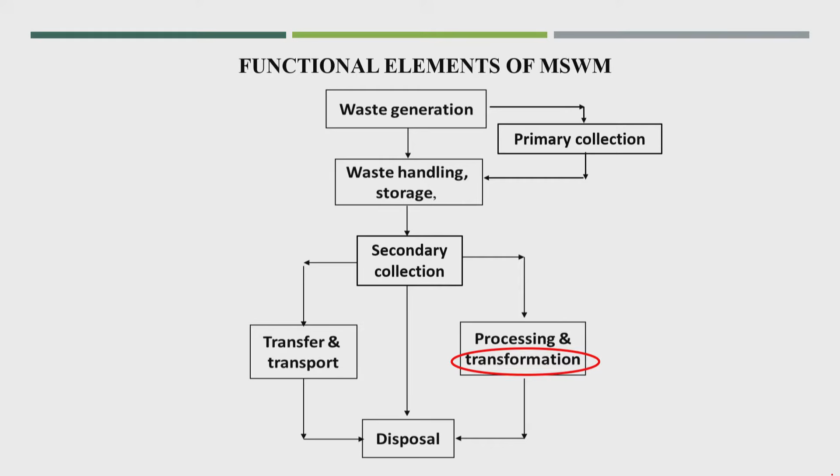So we are at module 8, chemical transformation, in the fifth functional element, transformation. In the previous class I talked about whether waste could be useful as a fuel. So you got the idea about whether the waste could be used as fuel, again depending upon different parameters and especially on calorific value. So today we will talk about incineration, a proper combustion process.

So what is the meaning of incineration? Incineration is a waste treatment process that involves combustion of the waste at very high temperature in the presence of oxygen. We can call it combustion also, and it results in the production of ash, the solid residue produced after the combustion or incineration process. Flue gases are produced, very polluted gas, and along with that, because it is a combustion process, heat also gets produced.

So incineration is a feasible technology for combustion of segregated waste, as I already told in the previous class. If you have segregated waste, especially at the source, the dry waste is very good for the incineration process, especially paper and plastic, which are highly combustible matter with very high calorific value.

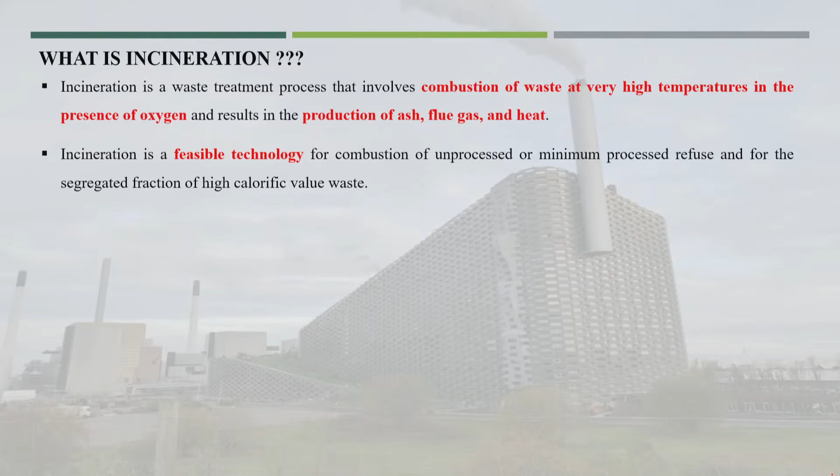And this is one of the very best technologies to reduce the volume, because the ash percentage is very low, 5%, maximum 10%, not more than that will be produced. So volume reduction of 90 to 95% is possible from this technology.

The potential for energy generation, because that heat we can convert into power or energy, depends upon the composition, density, moisture content, and different parameters, especially the volatile solids. If organic content or volatile solids are more, then the energy production will be very high.

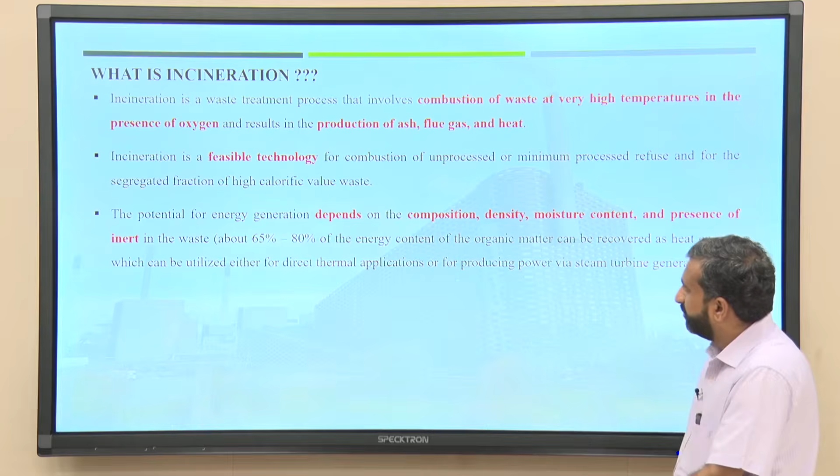About 65 to 80% of the energy content of organic matter can be recovered as heat energy from the incineration process, which can be directly used in thermal applications for producing power or steam turbine generation. We will get three different products: heat will be the first product, from that steam we can produce, and from that power we can produce.

As I was talking about, incineration helps to reduce the landfill volume. Obviously, the volume reduction is more in this case. So whatever waste is reaching the disposal site or landfill site, at least that landfill site can work for more time.

Incineration is feasible when there are no better options for processing of waste, or a shortage of land for landfilling. So this is a very important point, if no better option is available. So what could be the better option for this dry waste, which is also combustible waste? The better option is recycling, which we talked about in the last few modules.

Recycling is the better process, because there is no need to worry about the flue gas or whatever ash is produced, and we do not need much energy. There is no need for this very high temperature combustion process in recycling, so that is the better process. Or not recycling, but reuse of those materials could also be possible; that is also a better option. If those kinds of options are not available, then incineration is one of the very important technologies or better options.

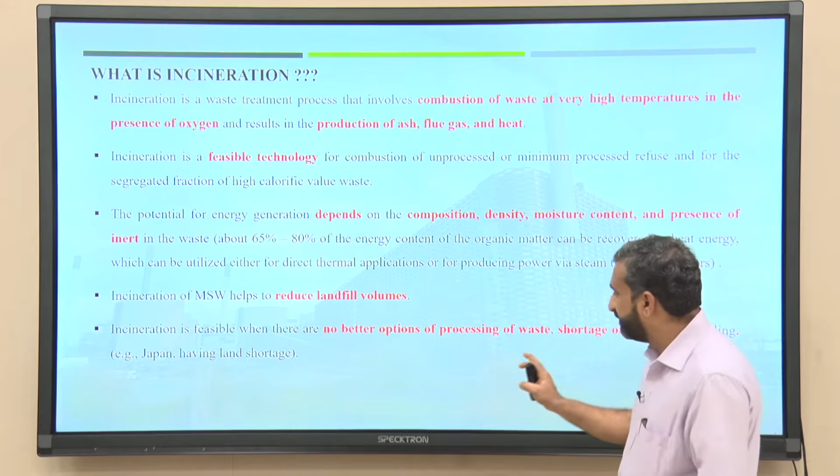And also where there is a shortage of land, like one example given, Japan is a very small country, the land availability is very low. So such countries cannot depend upon finding land for landfilling of such waste. So this technology is a better option for such countries.

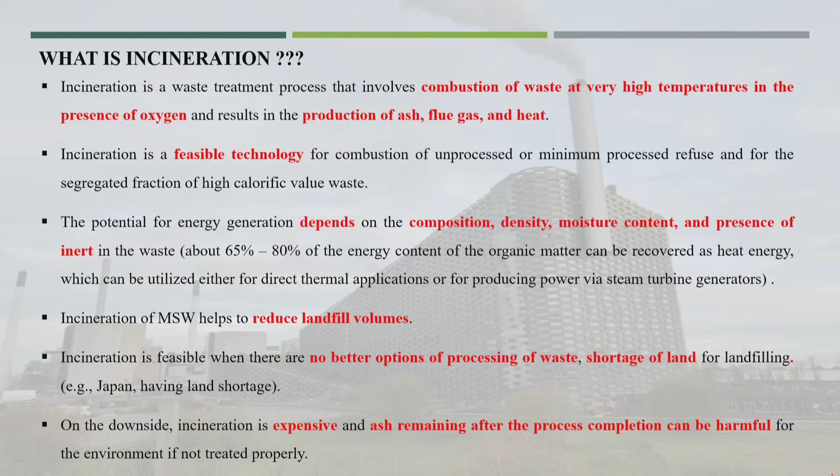On the downside, incineration is an expensive process, and the ash remaining after the process completion can be harmful. Not only the ash, but also the flue gas produced. We need a lot of treatment processes to treat the ash and the flue gas produced during the incineration process.

Now, the incineration process, what exactly is the incineration process? In brief, in the furnace the combustible components react with oxygen in the combustion air and release a significant amount of hot combustion gas. That combustion gas we normally call flue gas. The moisture content of the waste is evaporated in the initial stage of the incineration process, and then the combustible

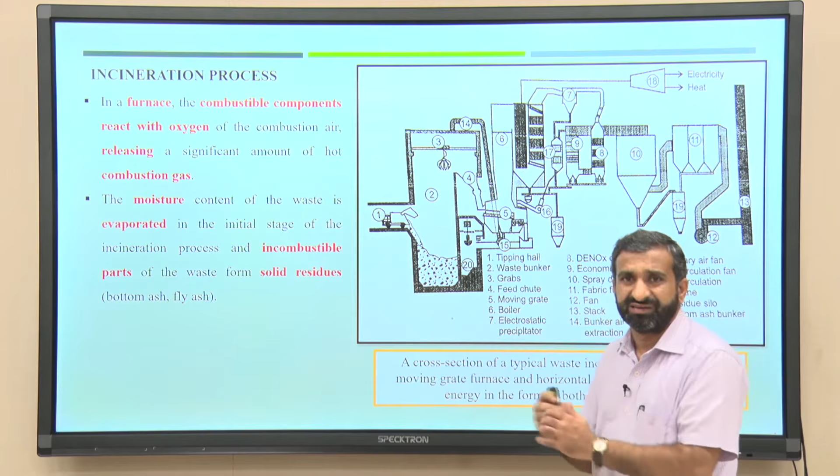matter will get combusted. So, the furnace is designed in such a way that initially when the waste is received in the incineration process, first moisture will get removed and finally the combustion process will start, and because of that ash will get produced, and possibly uncombustible matter will also come out into the solid residue.

Through incineration, the solid constituents of the waste undergo a range of processes as a result of exposure to heat and contact with the combustion air. So, whatever dry matter is put into the incineration process or the furnace will go through a range of processes, the combustion processes.

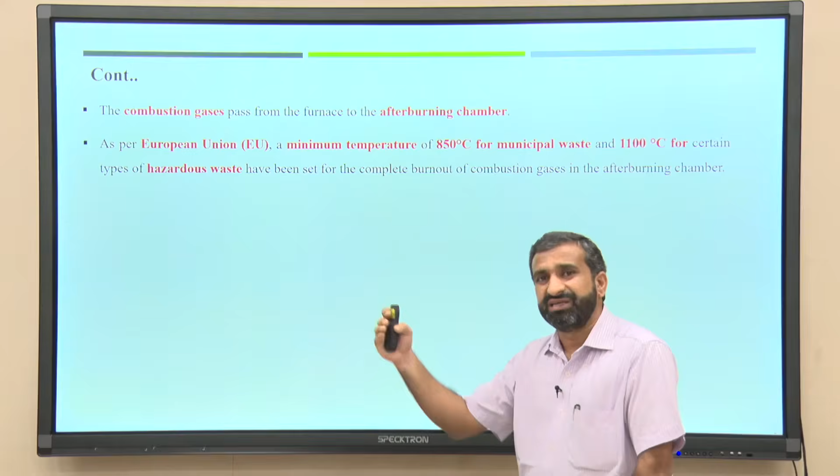Then the combustion gas passes from the furnace to the after burning chamber. There it undergoes the after burning process, and from that we can produce heat, and that heat we can convert into steam, and from that steam we can produce power from that particular combustion gas.

In the European Union, the minimum temperature is 850 degree centigrade for municipal waste and 1100 degree centigrade for certain types of hazardous waste. That is for the complete burnout of the combustion gases in the after burning chamber. So, you see that the European Union was the first, I can say, the countries

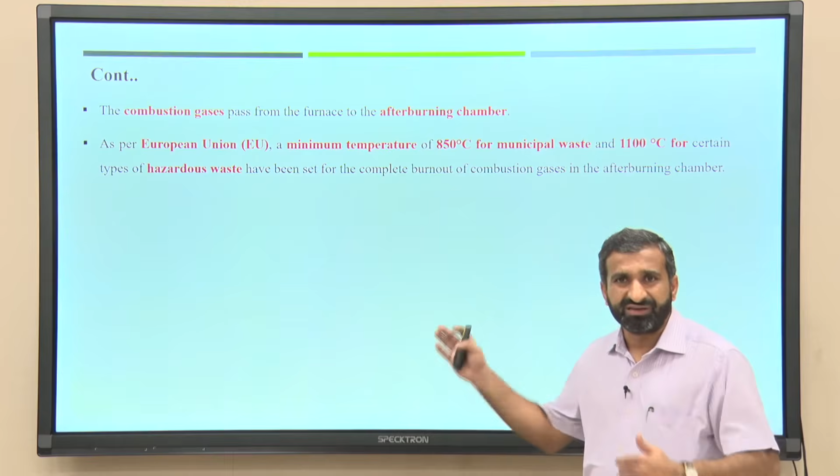under the European Union finalized the temperature of 850 degree centigrade in the first furnace chamber, and for the after burning process of the combustion gas the temperature was finalized at 1100 degree centigrade, and this temperature should be maintained for a minimum time of 2 seconds as measured from the last injection of combustion air. So, that is the first time the European Union came up with such standardization of the furnace temperature.

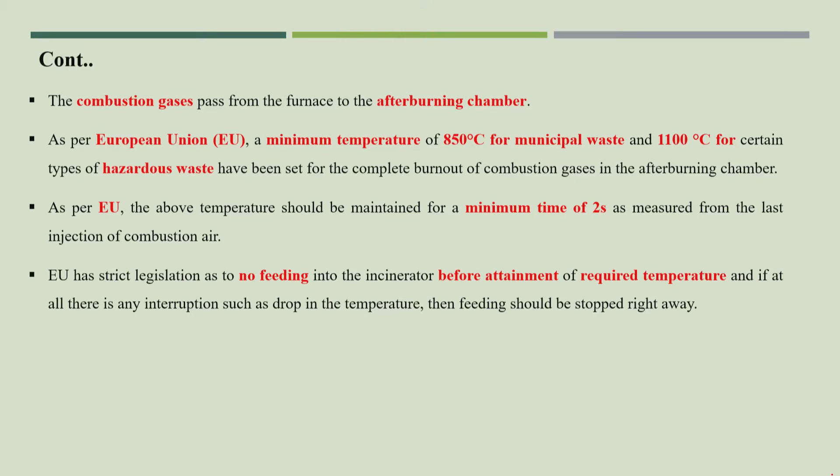A lot of countries like India also came up with some kind of legislation, which I am going to show here. The EU has strict legislation as to no feeding into the incineration before attainment of the required temperature. See here, they made it very strict legislation: no feeding if we are not attaining the required temperature. That is the important one. If we are not getting a temperature of 850 degree centigrade, we can't feed that kind of waste into the furnace process.

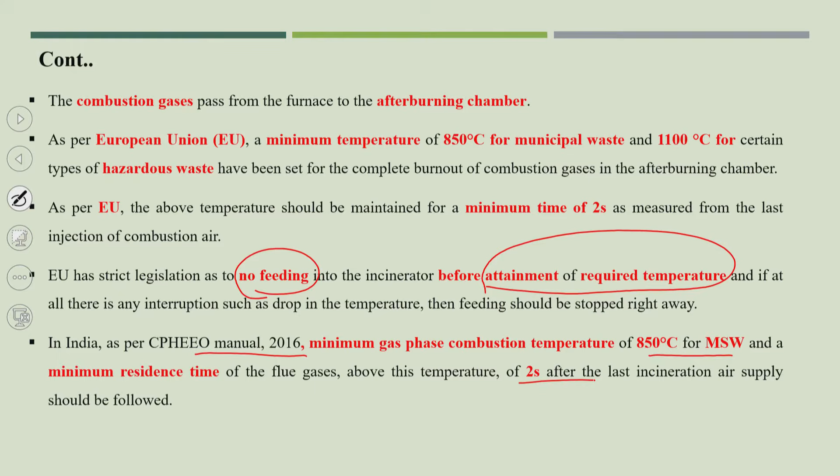And now, because we also have the Solid Waste Manual 2016, India also came up with this kind of standardization. The minimum gas phase combustion temperature is the same, 850 degree centigrade for MSW, and the minimum residence time of the flue gas above that temperature is 2 seconds after the last incineration air supply. So, this standardization also came up.

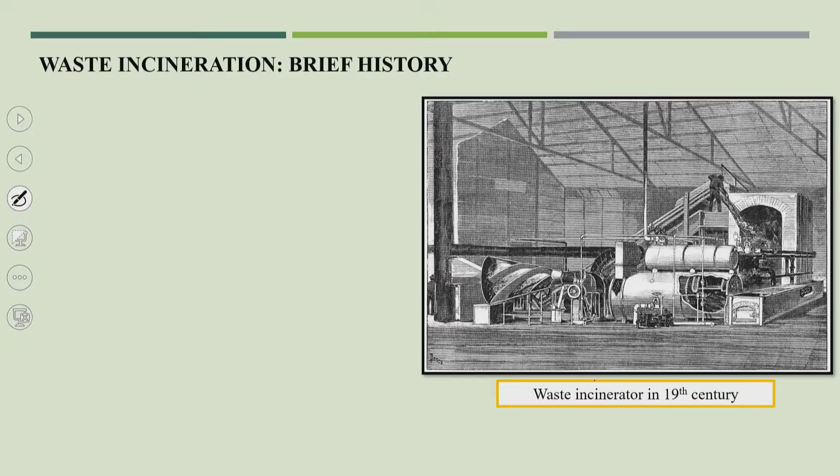I will give a few more standardizations or suggestions from the Solid Waste Manual of 2016 if you try to install incineration plants in India, especially for MSW. Now, before going into the incineration process, I thought of showing you some brief history of the incineration process.

So, the first incinerator was developed in the UK in the 19th century; it is a very old method, because the problem was that in all European countries and especially the UK, land availability was very low, and they started industrialization 100 years before. And these industries did not have proper treatment processes for their solid residues, not for polluted water, wastewater, and not for the solids either.

And most of the waste they were able to combust. So, that was the idea behind starting incineration in the 19th century in the European countries. And waste incineration plants treat waste of great variation in composition. Obviously, in those days, 100 years or 50 years before, in the European countries the composition also used to have very large variation.

And this is one of the technologies of the incineration process. We are also going to talk about moving grate technology, which was developed in the 1920s and 30s, and developed as a combination of grate with rotary kiln. This is another technology. Normally, we can find the rotary kiln after the moving grate technology. So, both technologies together, which I am also going to talk about in the next lecture.

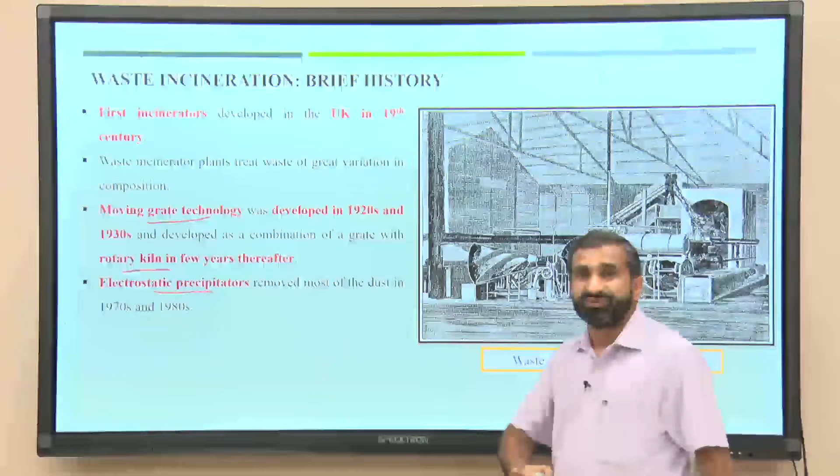This is one of the very important technologies to treat the solid concentration in the flue gas, especially dust. Very small particles of dust can also be removed from the flue gas, and the flue gas is a very high temperature gas. Temperature goes up to 600, 800 degrees, and from that the dust is removed by this kind of technology.

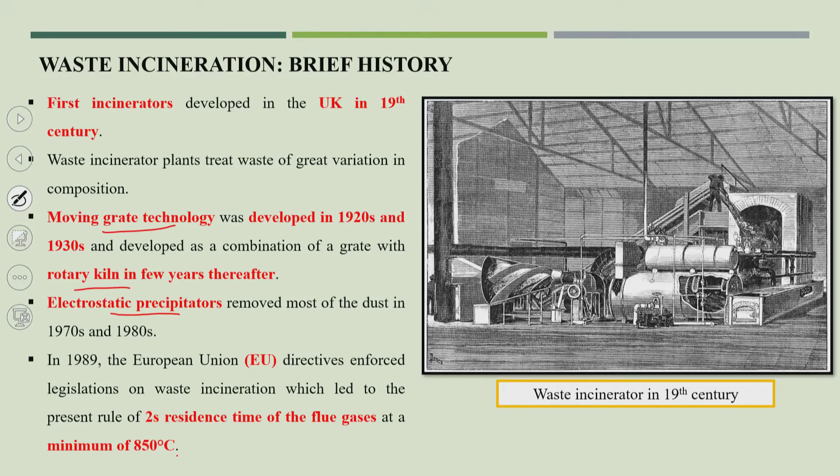In 1989, the European Union came up with this directive, which I showed in the last slide: 850 degrees centigrade with 2-second residence time. Okay. In 1989. Now, we will talk about the combustion technology.

The combustion system is commonly referred to as the heart of an incineration plant. The combustion system can be classified into two different types. First is the mass burning of non-homogeneous waste. So, it is simple combustion, mass burning, complete burning, especially for non-homogeneous waste.

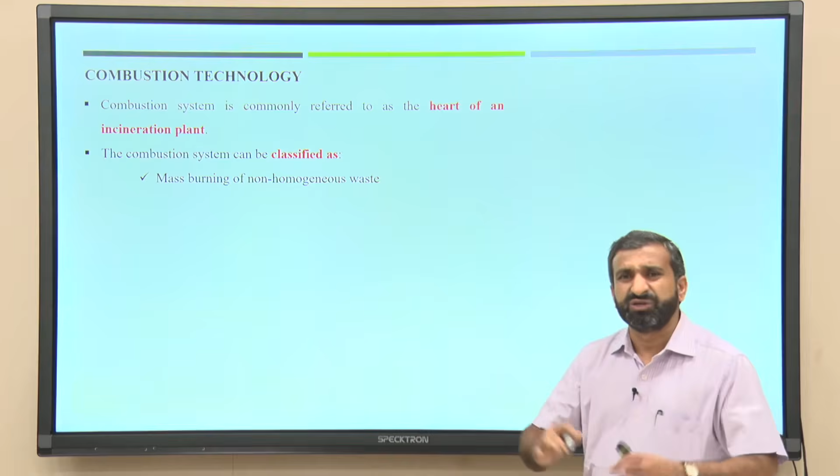Especially in a developing country like India, we are getting a lot of non-homogeneous waste, meaning a lot of heterogeneity in the waste. So such a combustion system could be used by our country also. This is moving grate technology, and the other is burning of homogeneous waste of limited particle size.

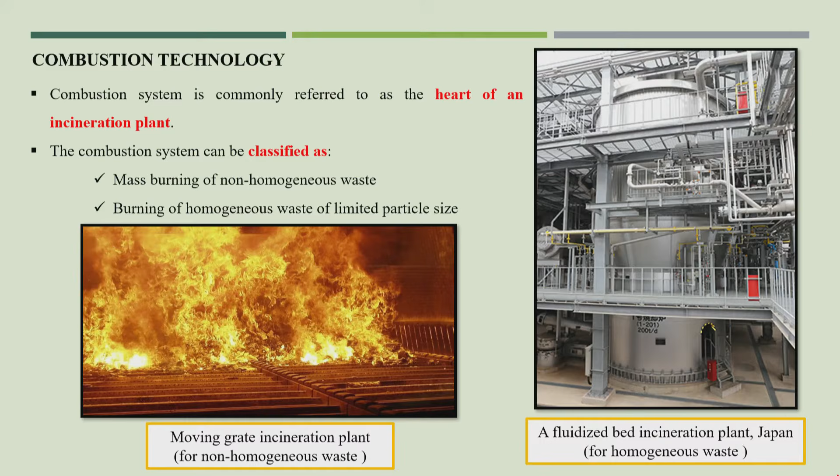This is another technology we are going to talk about, the fluidized bed incineration plant. This is specially for homogeneous waste, and a limited particle size is required. Normally, such technology is not that beneficial for MSW, but we need to know that if we are planning for a very special kind of waste like sewage sludge, or even plastic alone, such technology could be used.

Now, before incineration, especially in India, we require pre-treatment of waste or pre-treatment of the dry components of the waste. So, depending on the quality of waste and the incineration system, some pre-treatment technology may be necessary, which involves sorting and homogenization of the waste before incineration.

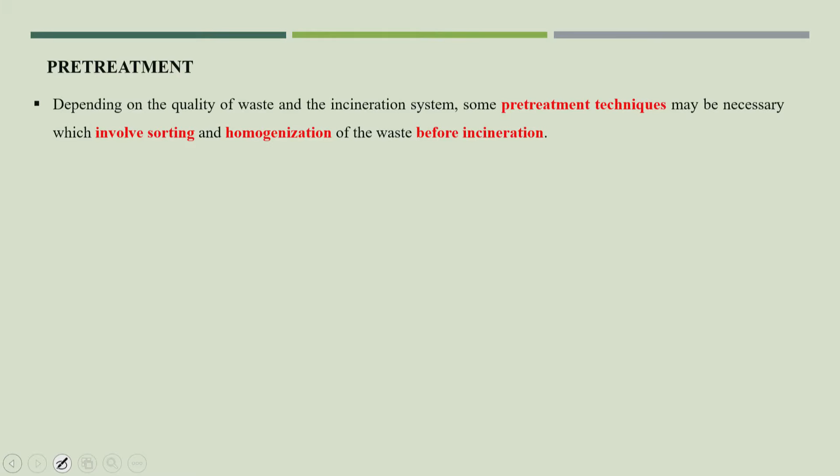That was the idea behind pre-treatment: sorting means contaminants or non-combustible matter will be removed from that material, and we try to homogenize the material, if not in the type or composition of waste, at least so the size is the same. So that combustion will be more beneficial.

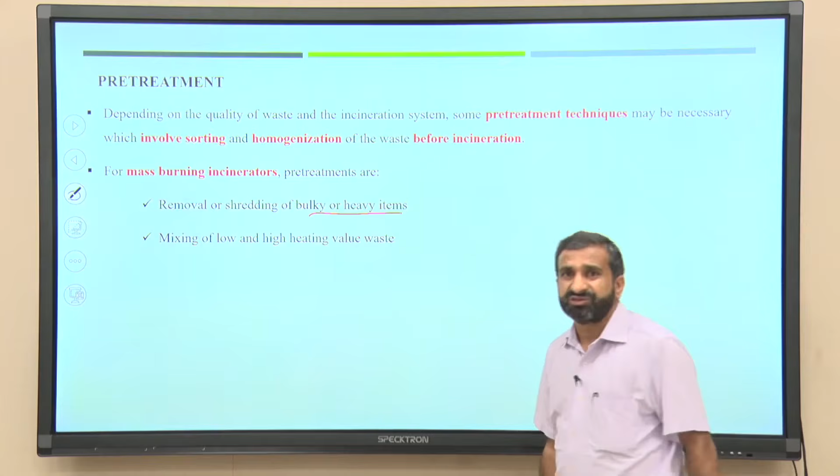So, for mass burning incineration technology, the pre-treatments are removal or shredding of bulky or heavy items. Large items are difficult to burn out completely in the furnace. So these bulky or heavy items are removed, and there is mixing of low and high heating value waste. This is also a very important

idea of pre-treatment, because the waste is collected from different locations in the city and different vehicles are coming to the incineration facility. So, it is possible that sometimes a vehicle comes with low calorific value waste and sometimes very high calorific value waste comes to the incineration facility.

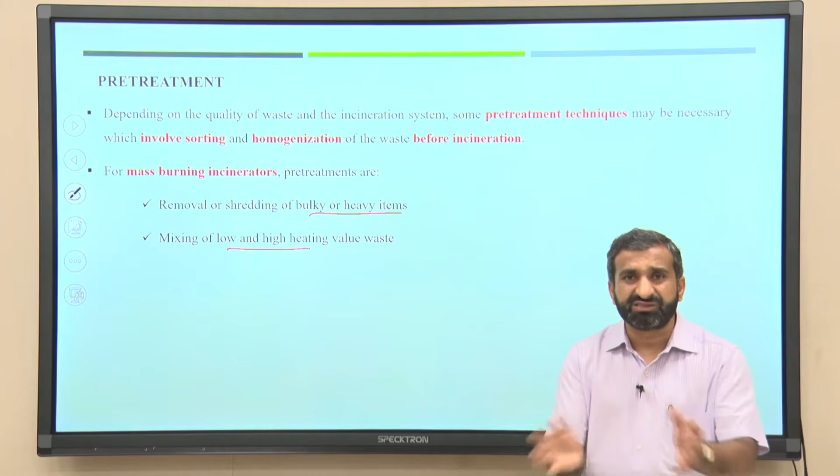So, this is a very good idea, if you can mix both kinds of waste. Then we will get the proper temperature in the furnace, which is what our standards require: maintaining a temperature of 850 degrees centigrade.

For homogeneous waste, pre-treatments are required; this is for the second combustion system facility. The pre-treatments required are shredding for homogeneity of waste, screening for narrowing of the particle range for the fluidized bed. Narrowing means making the size small for the fluidized bed technology, and removal of metallic iron with a magnet. Because not only metal, but glass also has to be removed for this technology.

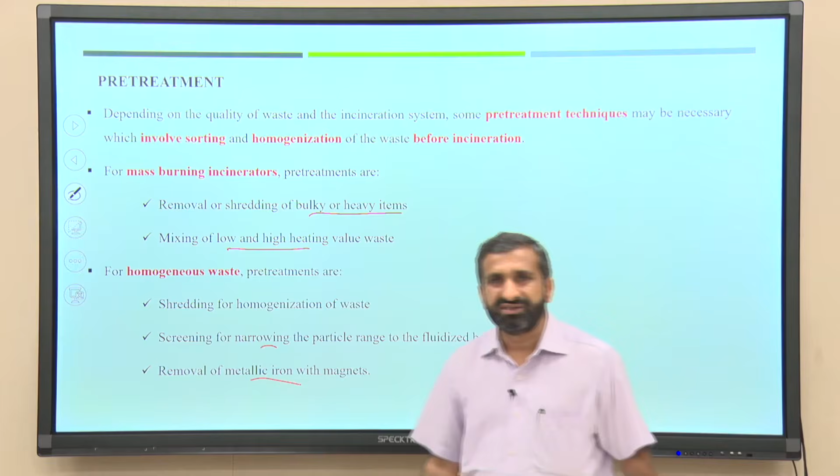Suppose in mass burning incineration the metal items or glass items are not sorted out. Those are not combustible items; they will come out into the solid residue, but that will not create any problem in the furnace.

So, now we will go for types of incineration. There are three different types of incineration. First is the moving grate incinerator. This is a very simple incineration facility, a very well known technology. Similar kind of technology we can find in coal power plants also. Inside the furnace you will find the grate. I will show you some photographs and pictures of the grate so you can understand.

The conventional mass burn incineration based on moving grates consists of a layered burning of the waste on the grate that transports the waste through a furnace. So, you see, it is a layered burning of the waste on the grate. The combustion will be on the grate, and then this grate will transport the waste through the entire furnace.

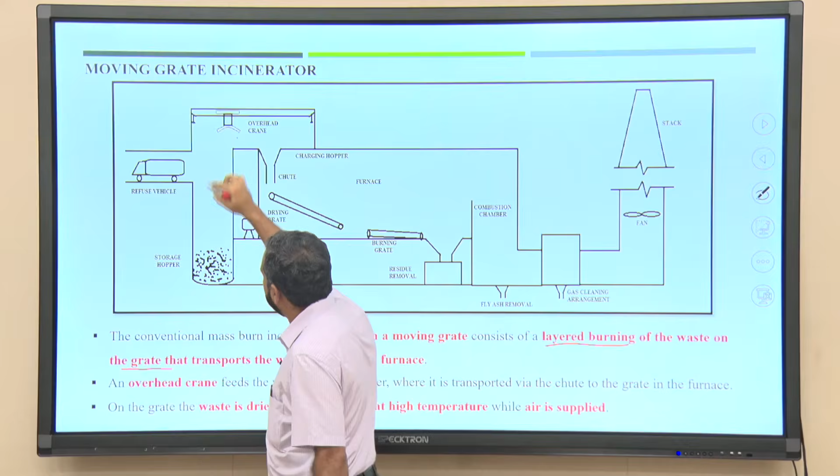Now, this is the line diagram. You can see here solid refuse is coming to the storage hopper, and this is the overhead crane. Through this crane the waste is fed into the incineration furnace facility. This is the furnace and these are the grates, this is one grate, this is the other grate. This is for drying, and a fan is provided at the bottom of the grate so that air can be supplied into the furnace.

Here waste is getting combusted and finally the solid residue will come out. This is the second combustion chamber; whatever combustion gases are produced get combusted in the combustion chamber, and after the second combustion chamber the gas will go through the gas cleaning arrangement. So, here is the flue gas treatment facility, and finally it goes to the atmosphere through the stack.

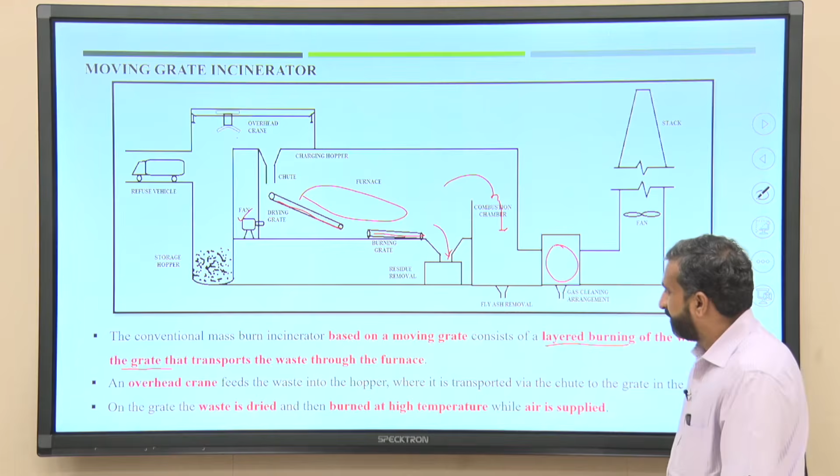Here it is written: the overhead crane feeds the waste into the hopper, where it is transported via the chute to the grate in the furnace. On the grate the waste is dried and then burned at high temperature while air is supplied. Now, the ash including the non-combustible waste fraction leaves the grate via the ash chute as slag or bottom ash.

So, this is the bottom ash; another ash of very small particle size will also be produced through the grate. When we talk about the solid residue, I will explain properly. And even in the flue gas cleaning treatment facility, a lot of fly ash will get produced.

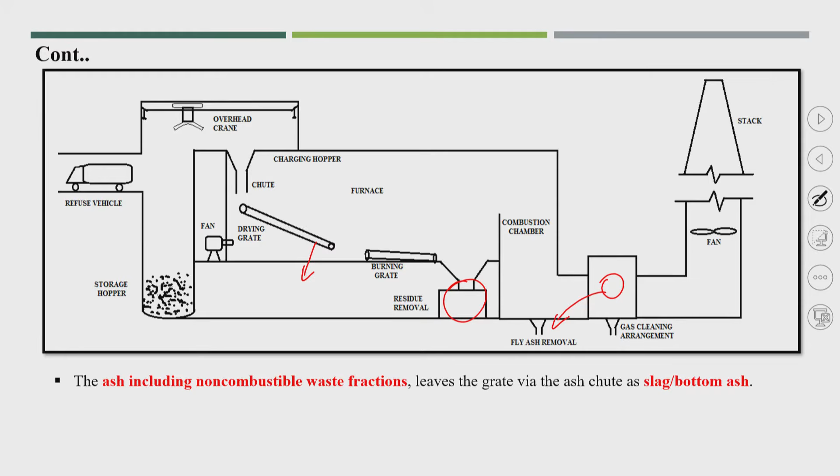The bottom ash or slag drops from the end of the grate into the water trap of the slag pusher. This is a slag pusher, here this is a simple water tank. Whatever bottom ash is produced goes into the water, because it is a very fine particle, for storage. There will be a slag pusher; this tank will get removed once it is completely filled up. Then another tank is provided in the same area.

The slag is cooled by contact with water, and a large piston pushes the slag to the conveying system. The amount of slag, the bottom ash, is usually 10 to 25% by weight of the waste feed, depending on the waste composition. So, you see here 10 to 25% slag will get produced by weight.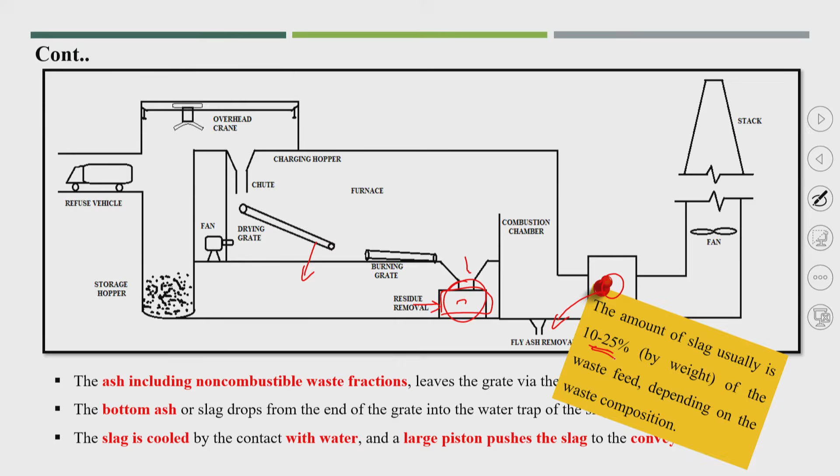Then fine particles and materials with low melting point may drop through the narrow gaps between the elements of the grate. As I was saying, from these the very fine particles or fine ash are produced, which is 1 to 5% of the total amount of ash production. The flue gas from the furnace contains a minor part of the ash. From this flue gas the fly ash will get generated. The flue gas constitutes about 5 to 10% of the total ash content.

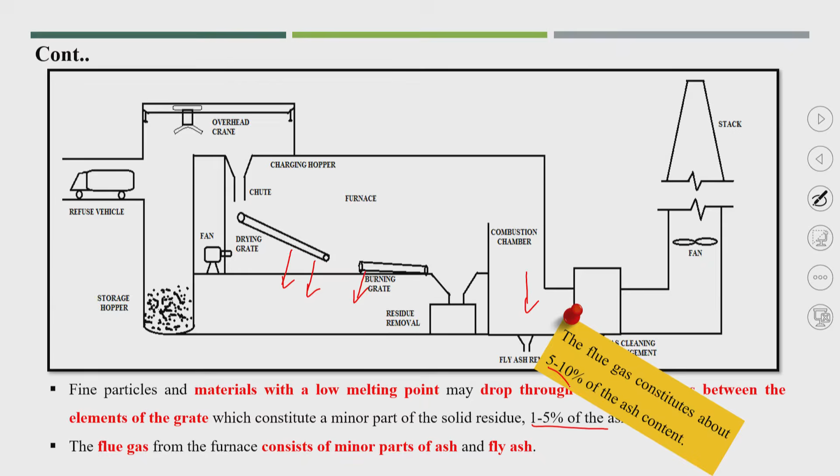Now, what are the advantages and disadvantages of the moving grate system? The advantage is it can accommodate large variation in the waste composition and in heating value.

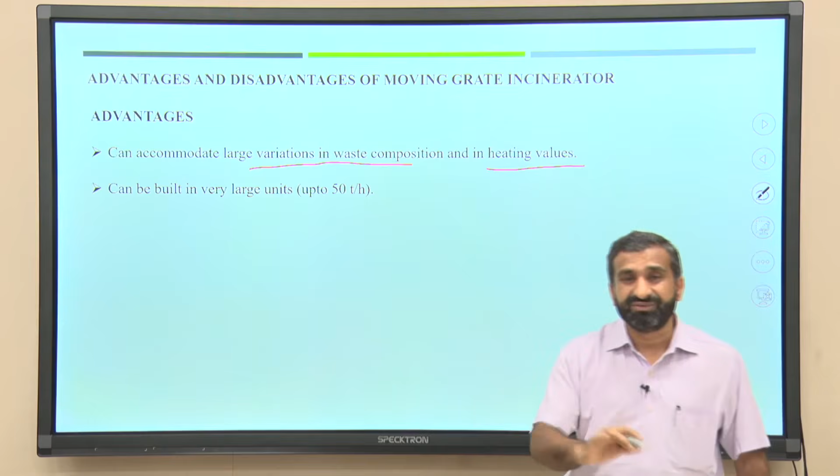So, what I was sharing about this technology is that it is highly beneficial for large variation in the waste composition, also variation in the heating value, and different calorific value mixes can be combusted in this technology, and it can be built as a large unit, up to 50 tons per hour capacity. This technology is very well known in coal power plants.

Another advantage here is that a lot of literature is available, and a number of countries have installed this kind of technology. So, when any new country like India is trying to have such an incineration facility, we can get a lot of literature, especially we can look at the failures of such incineration facilities.

And the disadvantage is that plant installation cost is very high and maintenance cost is also relatively high. That is the major problem of these technologies. All incineration and combustion facilities require a lot of money, not only for the capital cost, but the maintenance cost is also very high. So, if you are planning an incineration facility and not planning to get power production or any kind of product from it, it will be a very costly process.

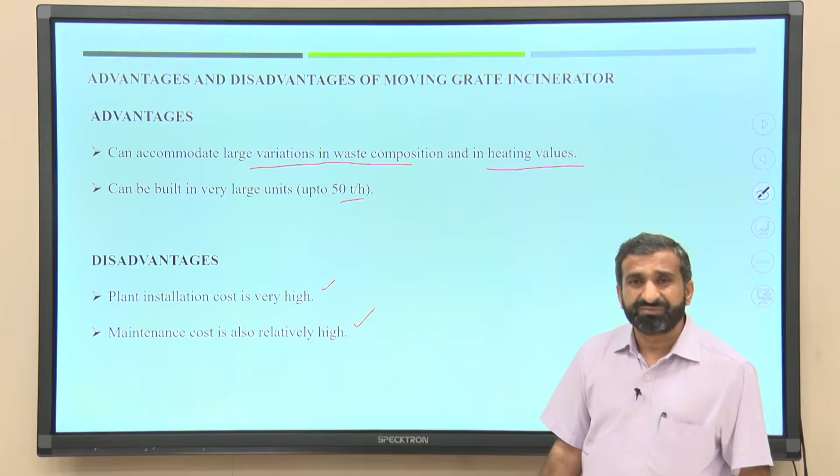So, in most cases, when countries tried incineration facilities, it was not only for volume reduction, but also to get some kind of product out of it. This product could be heat, steam, or power. By selling such products, we can at least recover some of the maintenance cost.

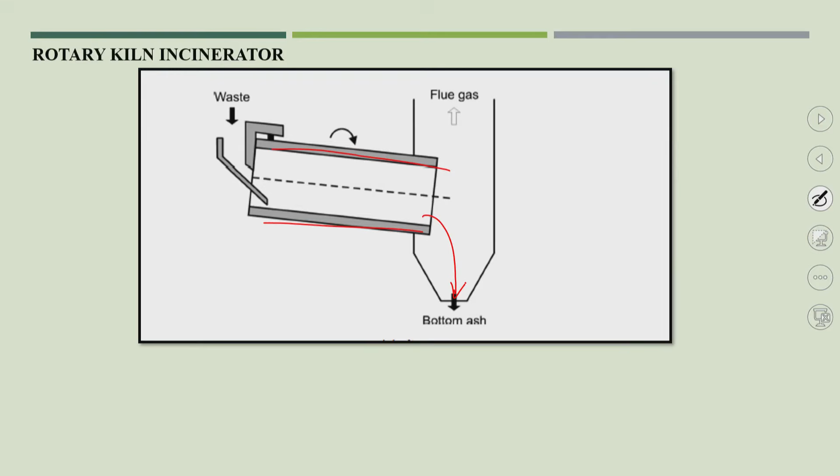Now, the next technology is rotary kiln incineration. You see here this is the rotary kiln, and finally, after incineration, bottom ash is produced and the flue gas comes out. Mass burning incineration based on the rotary kiln consists of layered burning of waste in a rotating cylinder. The material is transported through the furnace by the rotation of the inclined cylinder.

So, this is the cylinder that is rotated. The rotary kiln is usually refractory lined, but can also be equipped with water walls. So, these are the refractories or water walls. The diameter of the cylinder may be 1 to 5 meters and the length could be 8 to 20 meters. You can see here, this is the rotary kiln.

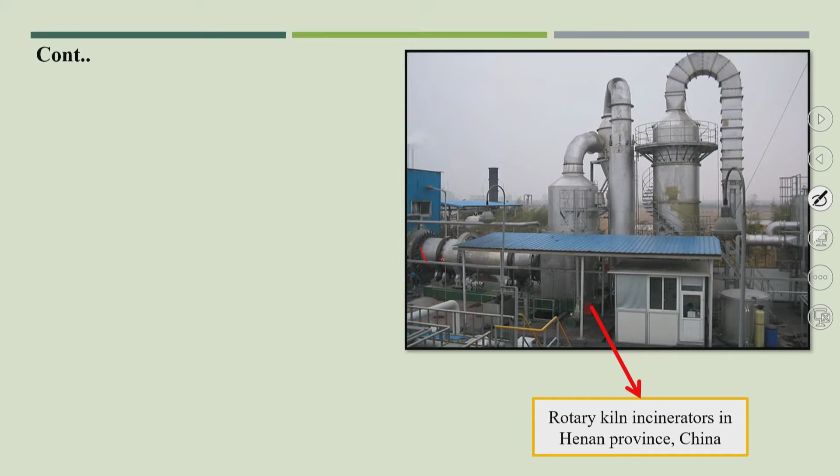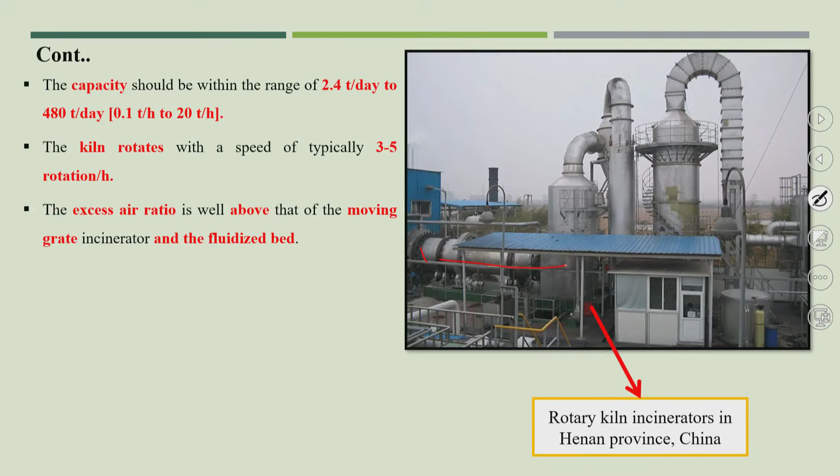The capacity is within the range of 2.4 tons per day to 480 tons per day, or 0.1 tons per hour to 20 tons per hour. The kiln rotates with a speed of typically 3 to 5 rotations per hour. The rotation is not that fast. The excess air ratio is well above that of moving grate incineration and fluidized bed incineration, which is a third type of incineration. So, more air will be supplied for the combustion process.

So, this is another incineration facility, a rotary kiln combustion facility from China. The energy efficiency does not exceed 80%, which I think is still acceptable.

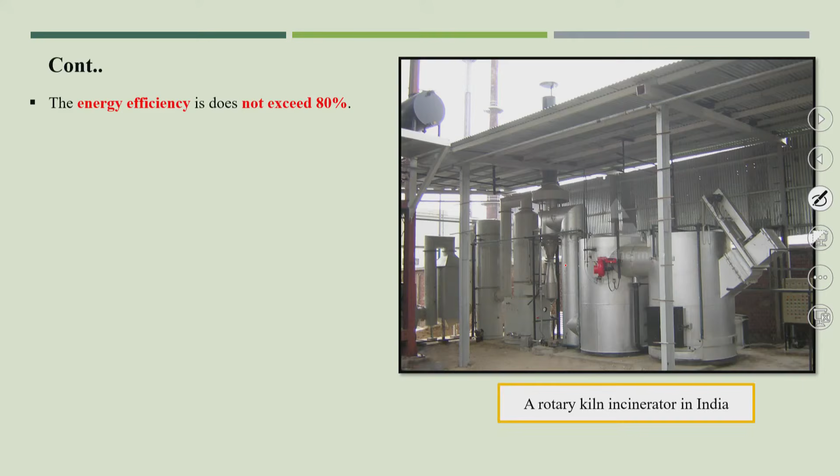The retention time of the flue gas is usually too short for complete reaction to take place in the rotary kiln itself, so the cylinder is followed by an afterburning chamber, which may be incorporated in the first part of the boiler. That is a very important point for the rotary kiln, because the retention time of the waste in the rotary cylinder is too short for complete combustion. So, providing an afterburning chamber is more beneficial.

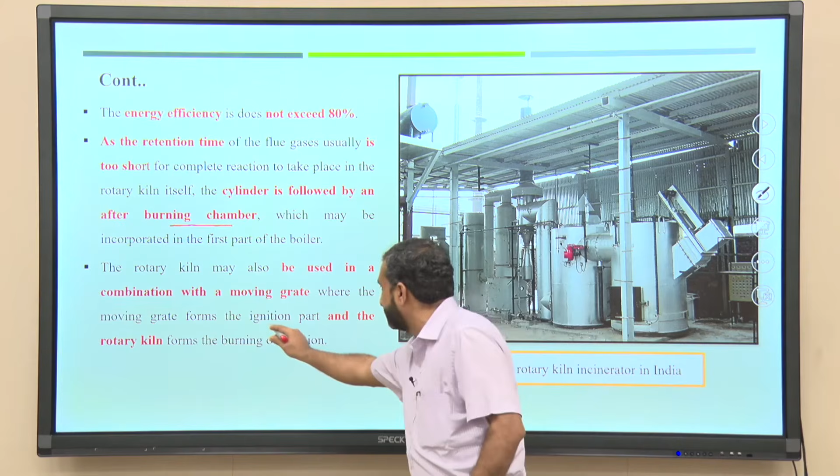Because of that, the rotary kiln may be used in combination with the moving grate, where the moving grate forms the ignition part and the rotary kiln forms the burning out section. I think this is a very good idea, combining the two technologies. The first combustion of the solid material will be inside the moving grate furnace, and whatever combustible gas comes out is combusted in the rotary kiln. Because in the moving grate a second combustion chamber is also required, this combustion chamber could be a rotary kiln system.

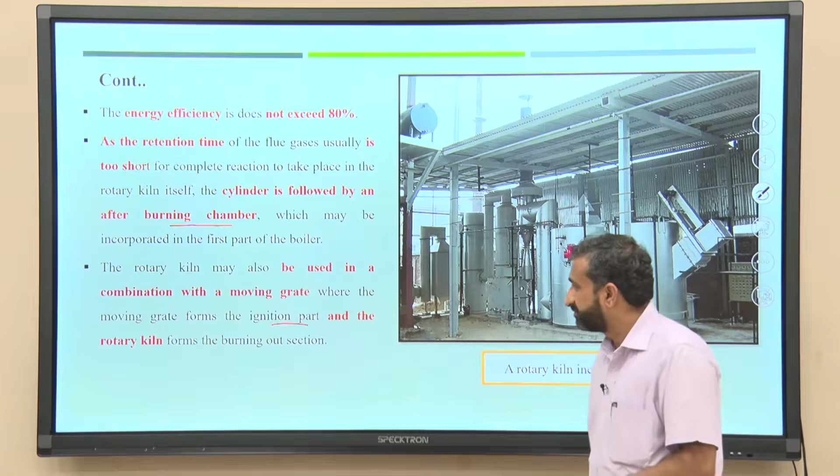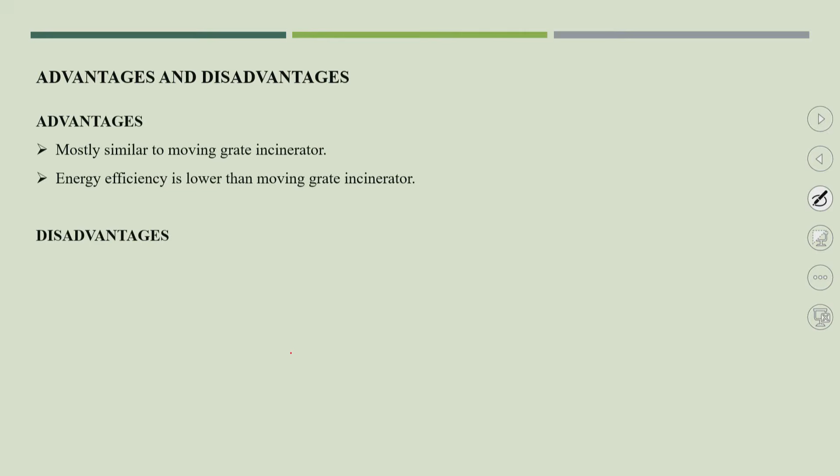Now, advantages and disadvantages. Advantages are mostly similar to the moving grate incineration, though energy efficiency is somewhat lower than moving grate incineration. Disadvantage is the same way as the moving grate system, the installation and maintenance cost is relatively higher, and rotary kiln may be rarely used for new MSW incineration plants with high heating value waste.

I think this kind of rotary kiln is good to use as a second combustion chamber for the combustion air, which will have low heating value.

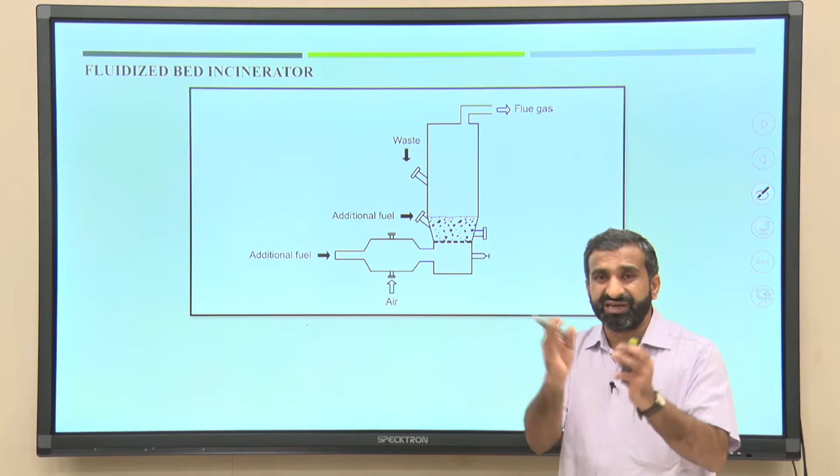Now, next is the fluidized bed incineration. So, as the name suggests, fluidized bed - inside the incinerator there will be a bed which gets fluidized, and the entire waste is also in the fluidized condition. Here is the line diagram of that. First I will explain the line diagram.

So, here waste is getting fed into the vertical chamber. This is the fluidized bed, and from the bottom air is added, and whatever waste is fed into the chamber will be in the fluidized condition because air is being supplied. So this is your combustion chamber, and whatever gas comes out will come out in the flue gas form.

There is a facility for putting some additional fuel for combustion to increase the efficiency of the combustion. The incineration works on the principle where solid particles mixed with the fuel are fluidized by air. By fluidization, the fuel and solids are suspended in an upward air stream, thereby behaving like a fluid.

See, this is the fuel and solids. These entire solids will be suspended in the upward air stream. The reactor usually consists of a vertical refractory-lined steel vessel containing a bed of granular material like silica sand, limestone, or some kind of ceramic material. This is the bed of granular material.

The fluidization of the bed is ensured by air injection through a large number of nozzles at the bottom of the incinerator, causing vigorous agitation of the bed material, in which incineration of waste takes place in close contact with the bed material and combustion air, allowing relatively low excess air and high thermal efficiency up to 90%. So here the small nozzles will be available from which air is supplied.

So that the entire solid material will be in the suspended phase. Suspended phase means the entire surface area of the material is available for combustion. Because of that, the thermal efficiency is very high in this kind of technology.

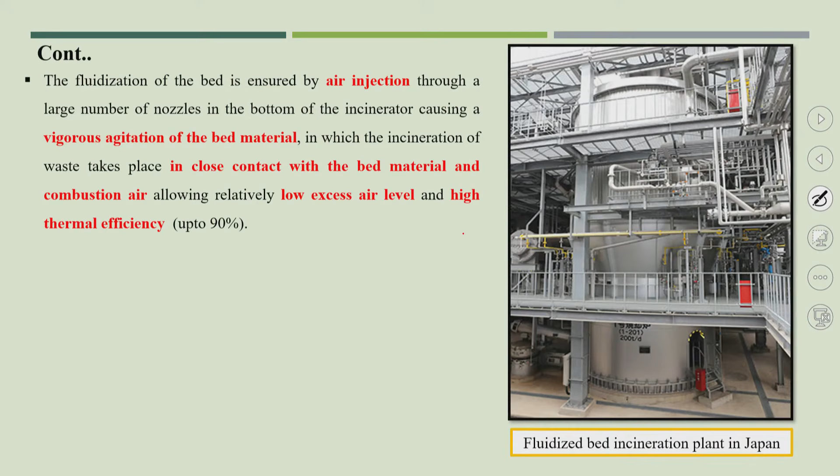I think this kind of technology has never been used for MSW, but for special kinds of material, because this kind of technology requires very special kind of material - a homogeneous kind of material. So in Japan or USA they use this kind of technology especially for special agriculture residues that are more homogeneous in nature.

Or in municipal areas, sewage sludge - dry sewage sludge is highly combustible, and because these kinds of countries are very developed, they have a large number of sewage treatment facilities, and because of that a large amount of sewage sludge is produced. So this kind of technology is very useful, because that material should be fluidized with the air.

So understand that this kind of technology cannot be used for very large particles, and not heavy particles either can be put into such combustion facilities.

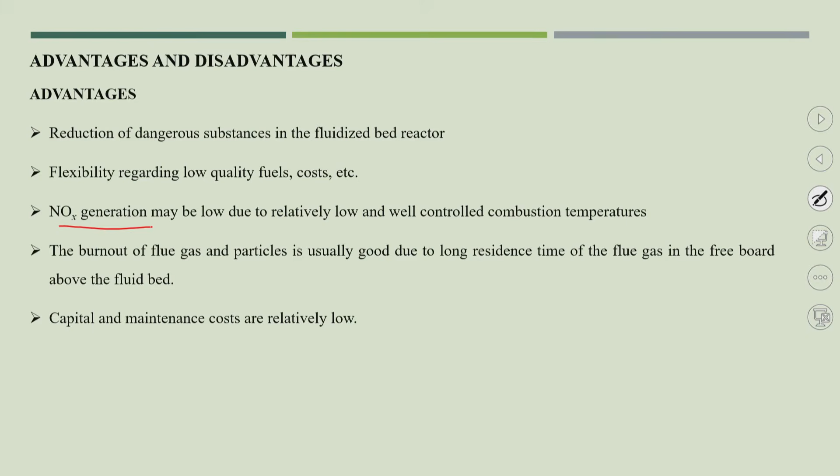Now, advantages - there are a lot of advantages of this technology, especially NOx generation like NO2, NO3 or NO production is low as compared to both the other technologies. That is the major problem with the moving grate and rotary kiln facilities, and even capital and maintenance costs are also relatively low.

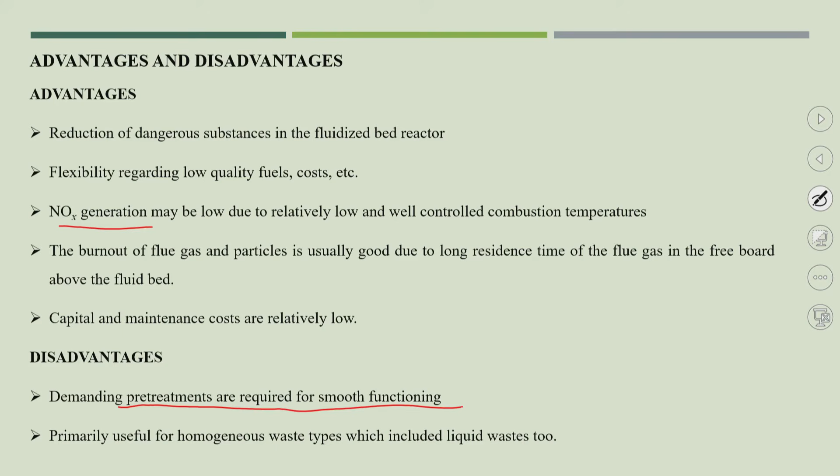And disadvantage - I put it as a disadvantage, but that is actually a prerequisite of fluidized bed incineration facility - pre-treatment is required for smooth functioning. It's primarily useful for homogeneous waste types, which include liquid waste also, because that could also be fluidized into the air.

Now, moving grate incineration plant design and layout. The grate has two principal purposes. This is the major design point or design idea behind the moving grate incineration facility, that is the grate.

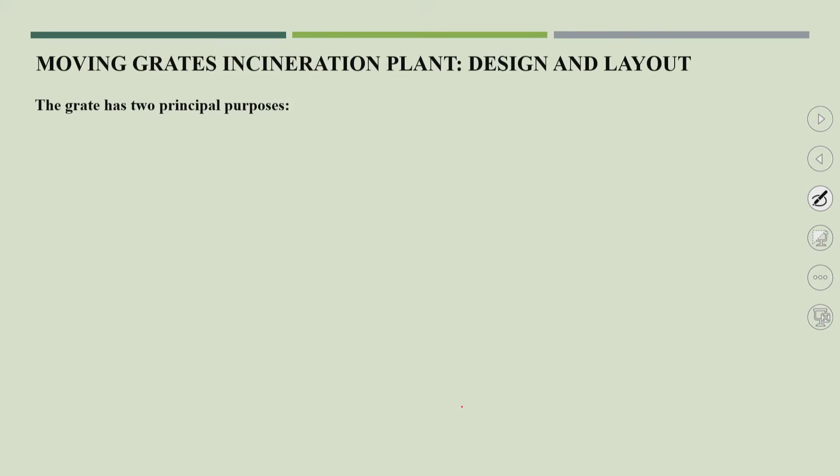Grate has two basic principal purposes: transportation, mixing and leveling of fuel or waste, and supply and distribution of primary combustion air to the layer of waste. That is the two major principles of the grate. First is the transportation, mixing or leveling of that particular waste material into the furnace area, and second is supply and distribution of primary combustion air to the layer of the waste, so that proper combustion could be possible.

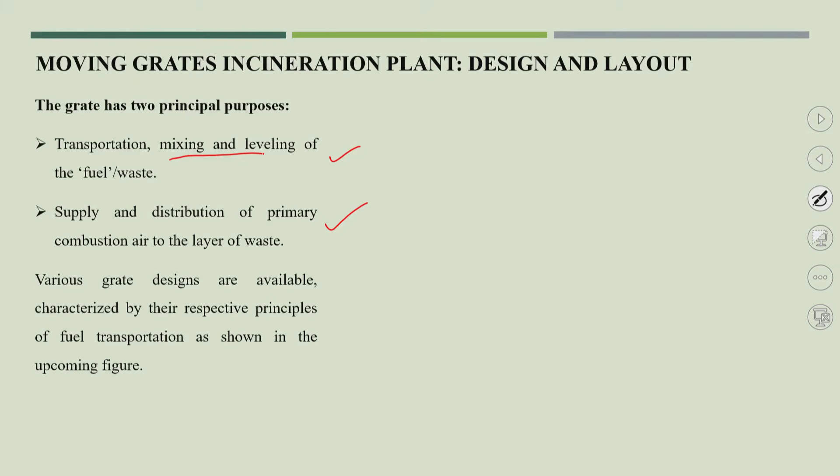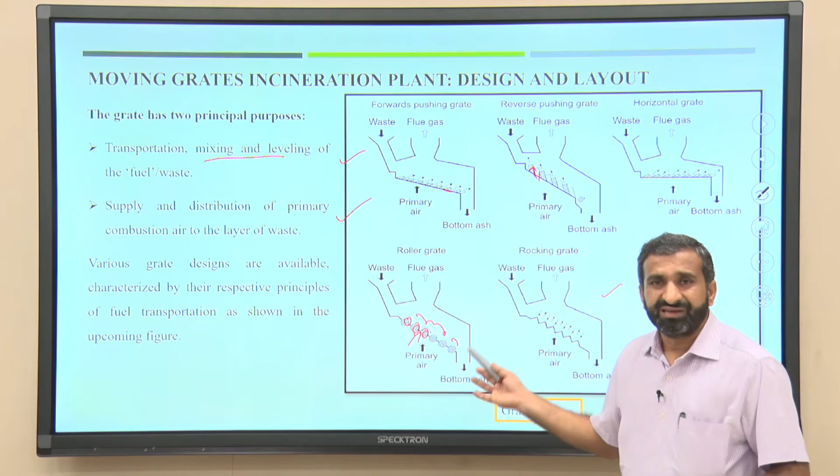Various grate designs are available, characterized by their respective principle of fuel transportation, as shown in the upcoming figure. So these are the different kinds of moving grates. This is the forward pushing grate. This is reverse grate, this one going upward, this is fixed, similarly horizontal grate, and this is roller. Here the rollers are there, and primary combustion air is added through small nozzles from the grate, and waste is getting transported and also getting combusted. This is another, rocking grate. So there are different kinds of grates available, and a number of different private companies install combustion facilities using different kinds of grates.

Grate important parameter: the grate length. Maximum of 65 to 70% of grate length is applied as a drying and combustion zone when operated at the design point at nominal load. Remaining length should be available to ensure final combustion and complete burnout of the slag and ash. That is a good idea to finalize the proper length of the grate. So 65 to 70%, meaning 2/3 of the area, is required for proper combustion, and the remaining 1/3 area will ensure final combustion and complete burnout of the remaining material.

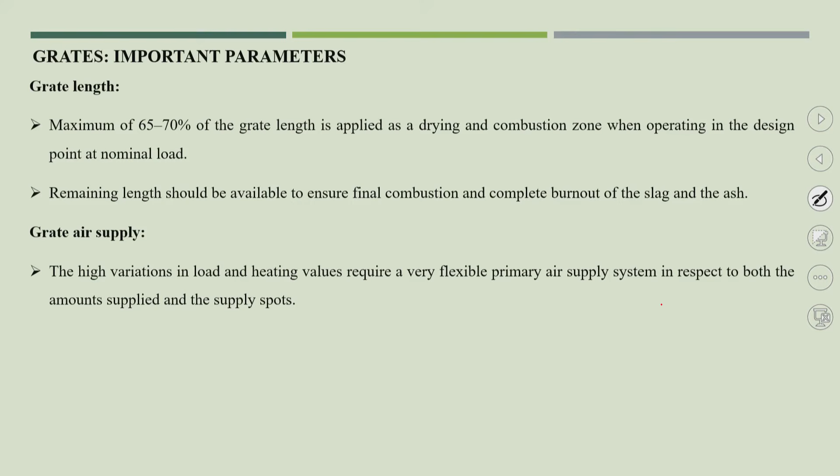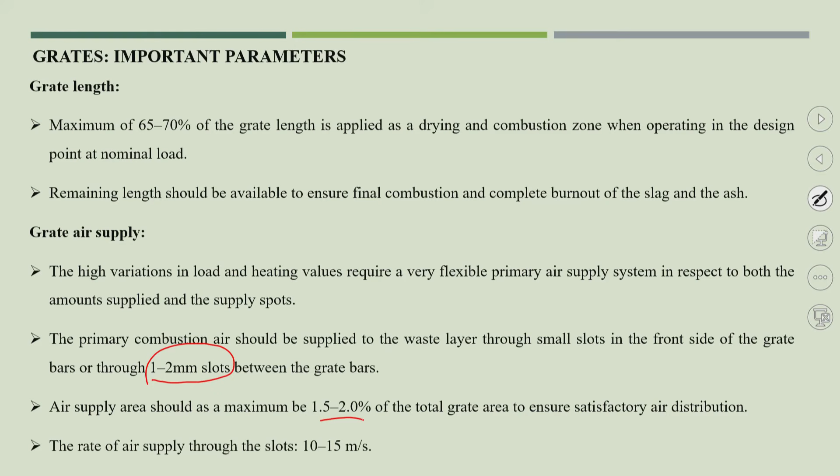Grate air supply: the high variation in load and heating value requires a very flexible primary air supply system, in respect to both amount supplied and supply spots. The primary combustion air should be supplied to the waste layer through small slots in the front side of the grate bars, with a slot opening of 1 to 2 mm between the grate bars. Air supply area should be a maximum of 1.5 to 2% of the total grate area to ensure satisfactory air distribution, and air supply through the slot should be at a velocity of 10 to 15 meters per second.

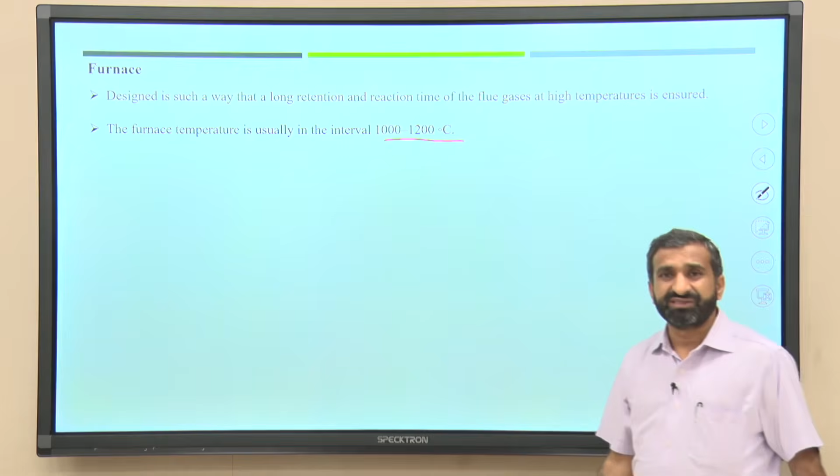Now about the furnace: it is designed so that long retention and reaction time of the flue gas at high temperature is ensured. The furnace temperature is usually in the interval of 1000 to 1200 degree centigrade, but minimum temperature in the first combustion chamber has to be maintained at 850 degree centigrade, and the second combustion chamber around 1100 degree centigrade temperature has to be maintained in the furnace.

Flue gas velocity in the furnace is maintained at a level lower than 3.5 to 4 meters per second. Furnace section depends on the flue gas flow direction. So this is the combustion chamber. This is one way of flue gas flow direction, this is counter flow, and this is mid flow.

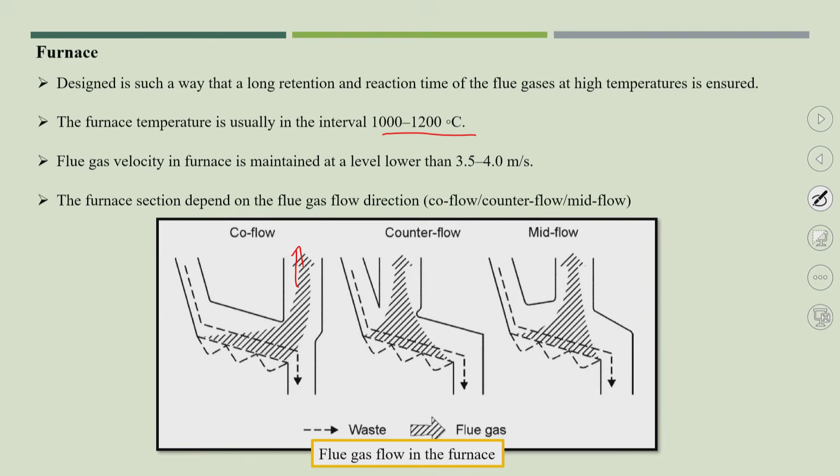Here we are not going to discuss much about the furnace design and all, because, as already told, this course is for environmental engineers. So we will just talk about what kind of flue gas will be produced and how best we can treat that particular flue gas.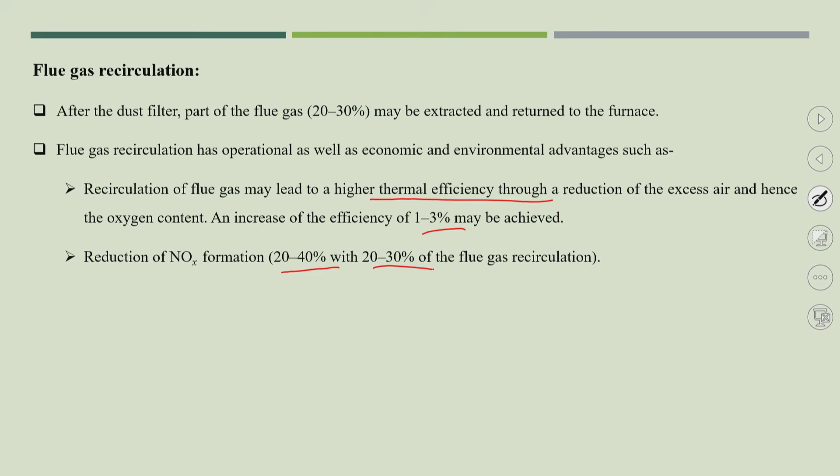After the dust filter, part of the flue gas, say 20 to 30%, may be extracted and returned to the furnace. Flue gas recirculation offers economic and environmental advantages. It can lead to higher thermal efficiency, with an increase of 1 to 3% achievable, since this flue gas already carries temperature. It also reduces NOx formation, one of the very important benefits, where 20 to 30% flue gas recirculation can lead to 20 to 40% reduction in NOx formation.

There is also a reduction in the amount of flue gas entering the flue gas cleaning system. So, obviously, the amount reaching the flue gas treatment facility will also get reduced.

Now, the energy recovery system: the energy released from the incineration leaves the furnace with the flue gas at a temperature of approximately 1000 to 1200 degree centigrade. The hot flue gases are cooled using the boiler before passing on to the flue gas cleaning system. In the boiler, the energy released from the incineration is recovered as hot water or steam, depending on the type of boiler. The steam thus could be used to generate power.

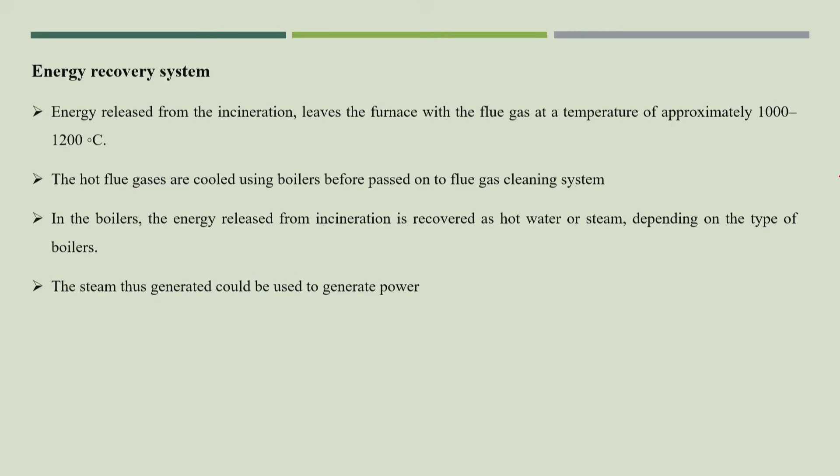So we will get three different products: first the heat, next the steam, hot water or steam, and from this steam we can generate power. So heat, steam and power, three different products come up. Normally, when people talk about waste to energy facility, they think energy means power. But the key is that energy is not only power; energy could be heat, energy could be steam, and energy could also be power.

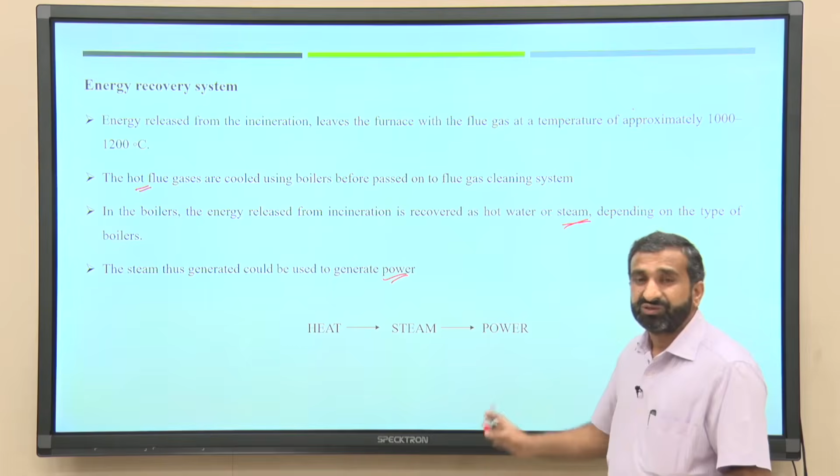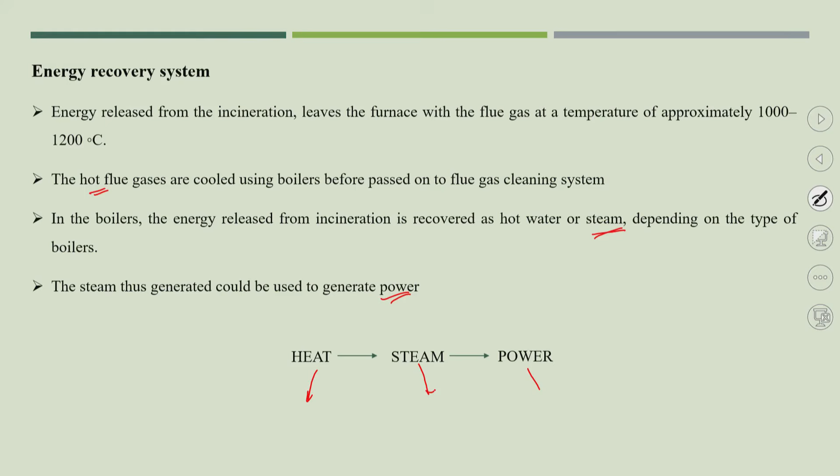There is a possibility that a number of companies, especially food processing industries or metal industries, require a lot of heat, or some industries require steam. So rather than producing power directly, why not supply this heat directly to such industries, and why not supply the steam to food processing industries that require steam? In developed countries, they installed incineration facilities in locations where such industries are available, rather than focusing on power production, because the efficiency of power production is very low, very poor. So why not supply either heat or steam to such industries instead?

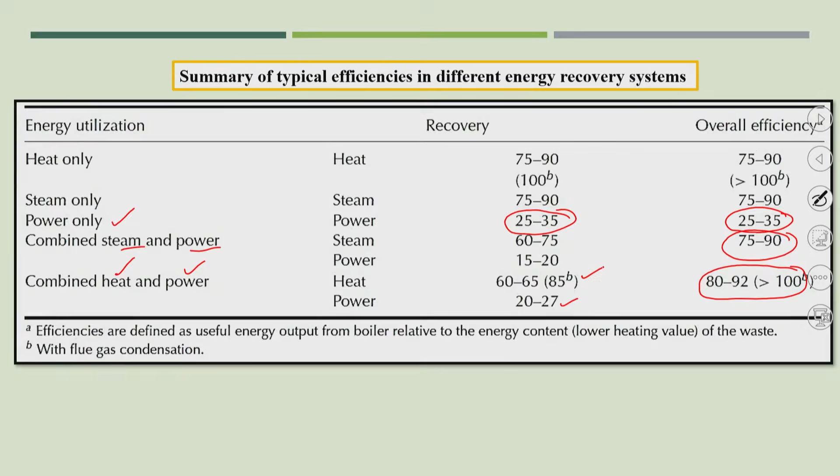This is one very important table which summarizes the typical efficiency in different energy recovery systems. Suppose you are planning for power production only from the waste to energy plant or incineration facility; power production recovery is only 25 to 35% efficient. So you can understand that planning only for power production is not that beneficial. But if you compare with steam and power production, the efficiency goes to 75 to 90%, and especially when planning for heat and power combination, the efficiency could reach 80 to 92%. In this case also the power efficiency is low, but the heat efficiency is 60 to 65%. So it is always beneficial to plan or install the incineration facility not only for power production, but also planning for steam or heat along with power production.

Here I come up with a slide to explain India's first waste incineration plant. In 1987, the Ministry of Non-Conventional Energy Sources (MNES) commissioned the Timarpur Refuse Incineration cum Power Generation Station in Timarpur, Delhi, at a capital cost of 20 crores. That technology came from Denmark. The plant was designed to incinerate 300 tons of MSW per day to generate 3.75 megawatts of electricity. The plant was shut down after just 21 days of trial. The trial failed, and the complete incineration facility was shut down because of the poor quality of the incoming waste.

In 1987, 1990, even up to 2000, if you see the waste composition, as I showed in the previous lectures, the composition of Indian waste was mostly biological in nature.

And in those days, the biological components used to be 60 to 70%, and everything was mixed; there was no segregation, and because of that, very poor quality incoming waste used to be received into this incineration facility. The calorific value of the supplied waste was in the range of only 600 to 700 kilocalories per kg, but the required calorific value was around 1500 kilocalories per kg.

They attempted to supplement the combustion with diesel fuel. Diesel fuel, even coal, was added to get the proper combustion temperature, but finally they put a lot of money into maintenance and running of that particular plant. Finally, the project was officially shut down in July 1990. So, within 2-3 years it completely shut down.

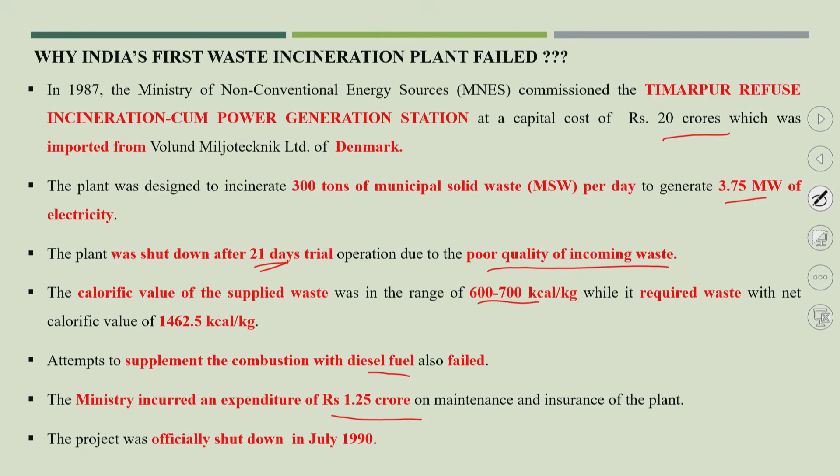I think I will come up with a few more case studies in the last lecture on incineration, because recently we have come up with some more incineration facilities in India, and I think we need to know some case studies about European incineration facilities; especially Japan is good in incineration facilities. So, one of the case studies will come up in one of the lectures.

So, here I come up with the last 2 slides on a few considerations for installation of an MSW incineration plant in India. Incineration is most relevant for the dry bin content in a 2 bin system. That is from the manual 2016. Pre-treatment is necessary for unsegregated waste, but if it is already segregated at source, there is no need of pre-treatment.

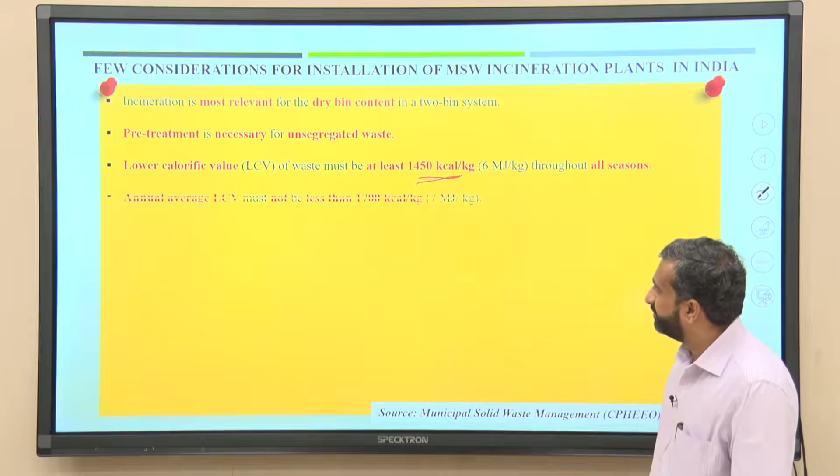Lower calorific value should be 1450 kilocalories per kg throughout all the seasons. That is the important consideration. In all the seasons, especially in the rainy season, we need to have this calorific value, and that is the lower calorific value, or net calorific value. The annual average must not be less than 1700 kilocalories per kg.

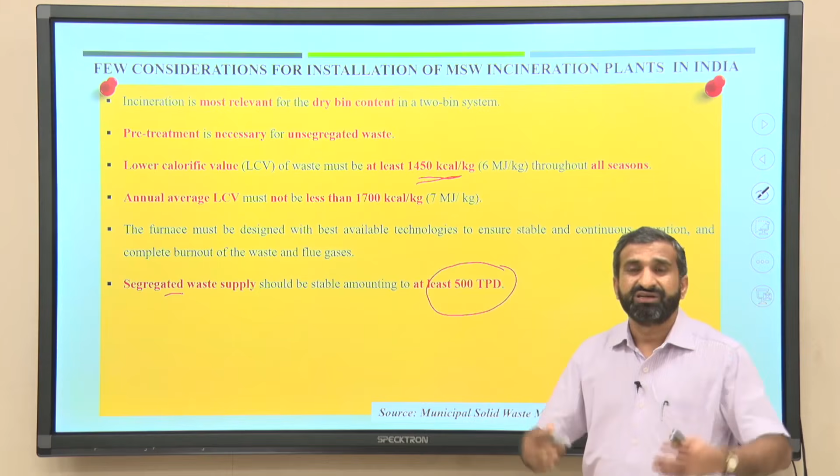The furnace must be designed with the best available technology to ensure stable continuous operation and complete burnout of the waste and flue gas. Segregated waste supply should be a stable amount of at least 500 tons per day. Only cities with large waste generation, like Kolkata, Delhi, Mumbai, Hyderabad, Bangalore, Jaipur, which produce 2000 tons per day or more, can come up with such large incineration facilities.

Skilled staff is also required; that is also a very important point. Since capital investment is high, the planning horizon should be 25 years of operation or more before planning installation of an incineration facility, and a strict monitoring system should be followed, especially for flue gas monitoring. And once you have installed the incineration plant, what considerations need to be followed for operation?

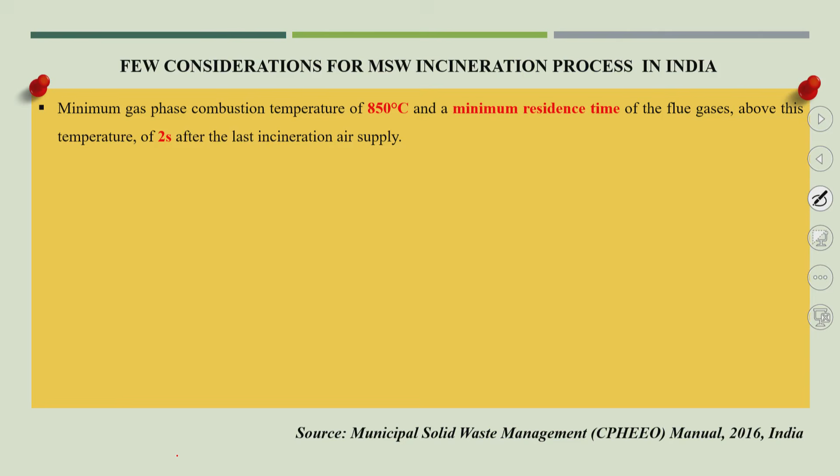The minimum temperature, which I already talked about, 850 degrees centigrade with a residence time of 2 seconds, and optimum oxygen content should be maintained for the combustion. Carbon monoxide content of flue gas is a key indicator of the quality of combustion, for the monitoring system. The fly ash acts as a catalyst for the synthesis of the important pollutants dioxins and furans. Standards have now been given in the monitoring system, so the production of dioxins and furans has to be monitored.

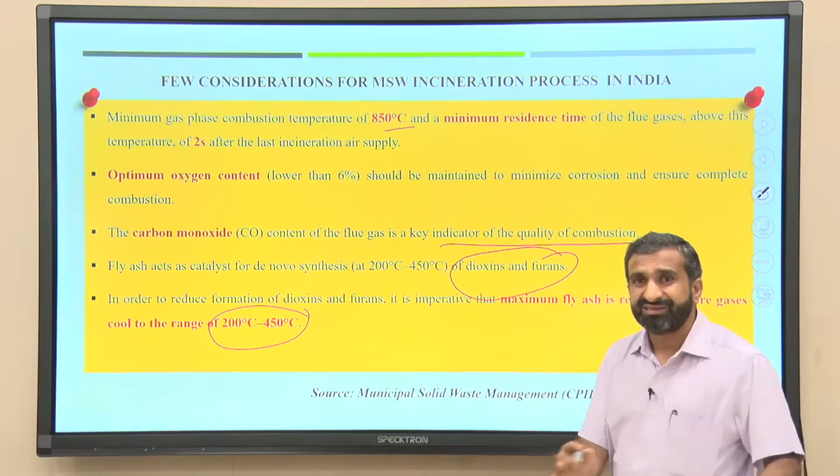And in order to reduce the formation of dioxins and furans, the flue gas temperature has to reach about 200 to 450 degrees centigrade, meaning cooling of the flue gas is very important for the reduction of dioxins and furans. So, these are a few considerations given in the MSW manual, and here we will finish this lecture.

Now, once you understand the entire incineration facility, there are two major pollutants coming out from incineration which, as environmental engineers, we need to understand: flue gas and solid residue. So, in the next lecture we will go for flue gas treatment, how best we can treat the flue gas, followed by solid residue. Also, in one of the lectures I will talk about a few case studies, so that you can properly understand incineration or chemical transformation of MSW.